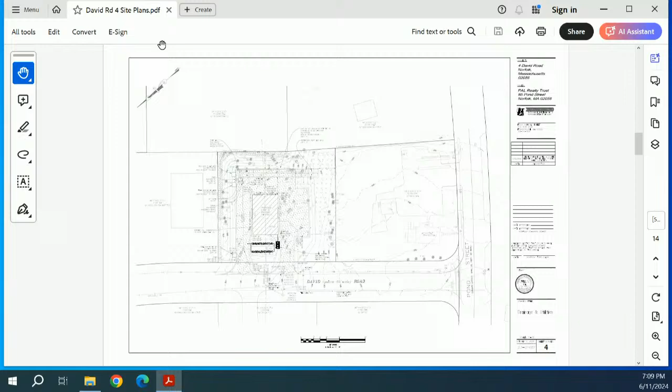Thank you, Richard. I'm Bill Buckley from Bay Colony Group, excuse my voice. As Richard said, one of the things we were waiting for was to find out if the community was going to put a water line down David Road in order to serve that development. One of the issues we had was having a well on the site. It's a relatively small lot, a little over 30,000 square feet, and you have to have separation from a well, from water, from drainage, and from septic, and it was just too tight of a site to do that. So when Richard came back and said what the community is looking at is putting a water line down there, that kind of solved that problem.

The other changes we made, if you look at the drawing here, we moved the building to the right, slid it maybe about 15 feet or so. The reason for that is the left side of this lot and the rear of the lot, if you had a chance to go out there, you can see that there are walls there.

There are already walls along the lot lines. What we were going to do was increase the size of those walls in order to maximize the amount of area that could be used for building and storage for the facility. Subsequent to that design, which we had filed, we went out and priced it, and found that it's really expensive for the additional area we would have gotten.

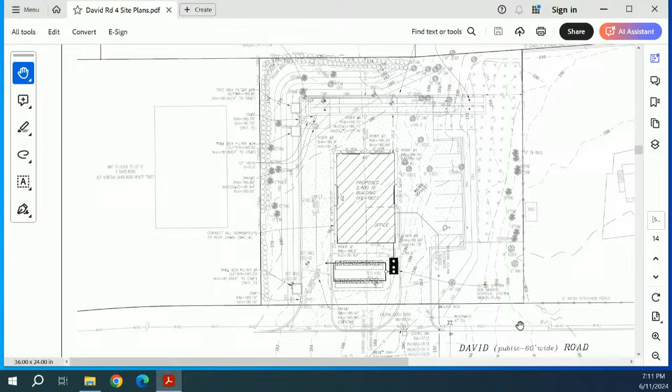So what we've done is moved everything to the right and from the rear. If you look at this drawing, in the previous design we had storage in the back here, and now we're sloping it up to meet the new grade there. Over on the left side, we took the top of the wall, not touching the existing wall, and sloped it up to meet our grade, which is about the same elevation as David Road out front. Right in this area, finished floor is 187.

So that's the major change. We also met with Richard and the building commissioner, and went over some of the zoning issues. For example, this loading storage area, this loading area in the corner here, I asked the building commissioner what he wanted, and he said just give me 400 square feet. So we gave him a 20 by 20 foot area for that.

We also changed the mixture. You can't see it here, but if you look on your plan sheet, upper right-hand corner, sheet 3, there's a zoning block. We changed the parking requirements. The numbers really didn't change, but we broke it down differently so that it conforms with the Norfolk zoning descriptions of use.

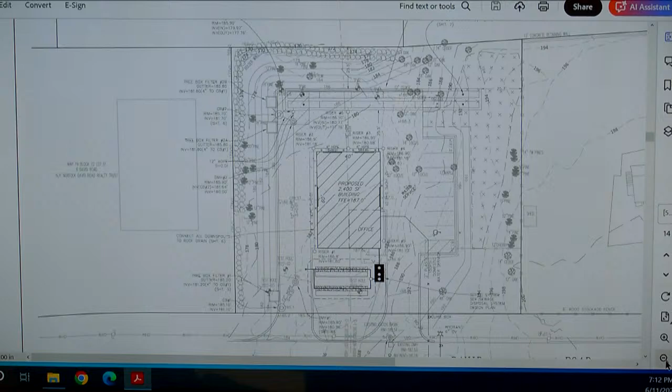So now it's some manufacturing, some storage, some general office space, and the building commissioner also told us to include parking spaces within the bays. So we have 11 spaces. We're required to have 7. We have 7 outside. So that was a change that we made as well.

And then there was a lot of detail-oriented work that was done for us in order to answer the consultant's comments. There's still a couple of things out here that Richard has highlighted for me to address.

The first one was the loading zone, 20 by 20, and they said typically it's 40 by 10, and the beta defers to the board. We don't really care. If you'd like it to be 40 by 10, that's fine, but the building commissioner said as long as there's 400 square feet, he's satisfied.

So what's the purpose for that loading zone? Good question. I would say it's probably just to pull up and take material out until it's moved inside the building. But realistically, I don't think it's going to be used. It's just a requirement under the zoning.

On this particular site, we have loading and unloading up in this area here, which any vehicle that needs to come in can either come in from the existing site, which they do now. Actually, this whole area, a lot of it is just gravel, or we're showing a forklift access down here. So a vehicle could pull in, unload, forklift up in here, store materials. But the intent really is to put the materials inside because of the business. It's a fencing business, so you don't want to store it outside until it's manufactured into whatever it's going to be.

In terms of zoning, the purpose of it is just to make sure you have adequate space on site, so you're not loading and unloading on the public ways or drives and so forth, and that it doesn't interfere with parking and circulation on the site. Okay, thank you.

One of the comments they made was they want a 4-inch thick, dense graded crushed stone, which is fine. We can add that under the pavement.

Their comment was 0.5% grade. They wanted us to add more drainage structures. 0.5% grade is a standard that's acceptable, and it's really up to the contractor to do the job correctly. Pavers usually don't like it, but that's tough. It's acceptable. We don't think it requires any more drainage.

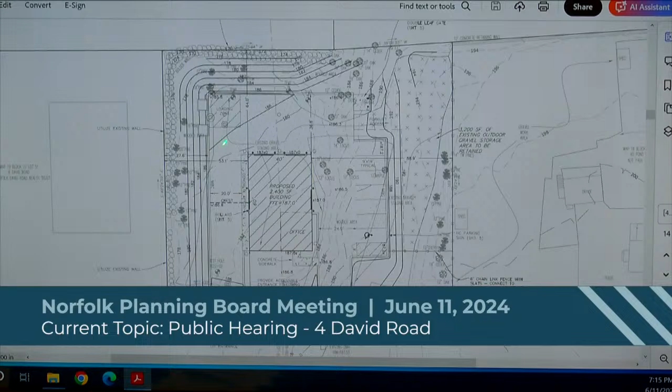Everything drains to the back of the lot now in this corner, and up in this corner here. Water either drains at this point, or drains to this catch basin, which is connected directly into an underground drain system not shown on this sheet. Then this flows around to the corner here. As I said, this is a small site, really quite a small site. So we believe the amount of structures we're showing is adequate, especially since the roof is being tied directly into the underground drain system.

So that's for P1? That's for the comments, sorry. No, that's for T1, the loading zone. T2 is the vehicle enter and exit, which I'll talk about in a moment. P1 is the profile. Just for ease of following through, if we could go through them in order. Sure, we'll go T2 next.

For T2, we provided a turning radius plan. These would be small tractor trailers showing up and supplying material. What we showed is a plan where the vehicle pulls down the street, backs in, unloads, and pulls out. It's a WB-40, not meant to go around the building, just to pull in, unload, and go out.

We actually raised or changed this radius to make it bigger. You can see here it was a 10, and we made it larger. Same thing on this side—if a tractor trailer was going to pull up, back in, and pull out, we made that radius larger as well. We received a notice from the fire department a couple months ago that said they found the access around the site acceptable.

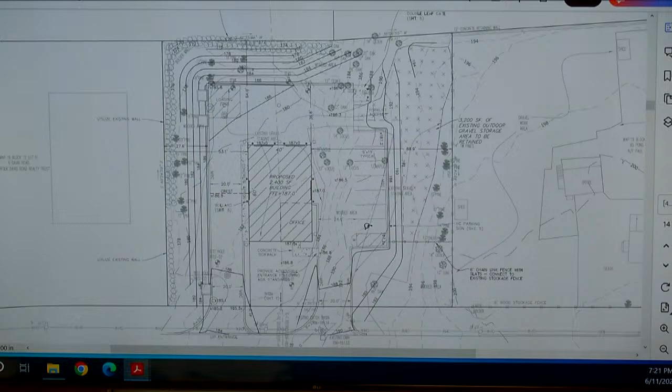That was for SW6. 6 or 7. Oh, yeah, okay.

And then SW21 is, I think, more of a pay attention item. It talks about sedimentation, where we're going to put temporary sediment basins, etc. Again, that comes under the construction stormwater pollution prevention plan when the contractor is chosen and decides his methodology to build the site. So that's a moving target as he moves forward on his design. I think somewhere in here it requires us, at a pre-construction meeting, to provide an updated stormwater pollution prevention plan, since at that point you'd have the contractor identified.

Yeah, although it's a popular topic, probably not going to require it, right? SWPP, because it's less than an acre? It doesn't require a NPDES permit, but we did prepare a SWPP plan.

So you do have a SWPP, okay. And it's on one of the sheets - I forget which one. All right, okay. Sheet 8. Yes, you're right, we have the pre-construction.

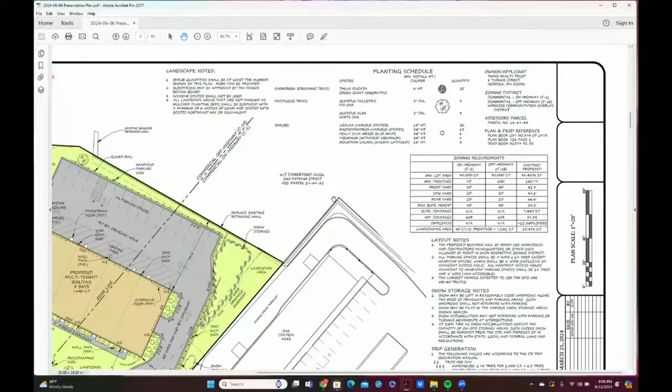We added more screening trees to the left of the site. We have a residential home next to us. We added a loading area across the back. We added a more detailed planting schedule, calling out particular species, sizes, trees and shrubs. And actually, the other thing we did is add a freestanding sign here. This will be on granite posts. It'll meet the size and height requirements of the bylaw. It's very much similar to other signs up in the industrial park there.

The majority of the work we did was on the stormwater management system. I think Bill was lucky he got first, because we separated our roof system from our driveway system at the request of the peer review consultant. So these two systems now work in tandem to handle all the driveway and loading areas, and the other system was separated out to handle roof runoff. We reworked some of the stormwater management calculations and report, and we got a clean bill of health from your peer review consultant. We also added a small rain garden down at the right driveway entrance.

There's really not a lot in Beta's memo outstanding. We can go through anything you want, but on SW1, there's a boulder wall across the back of the site. The applicant's going to replace it with an engineered concrete wall. Detail was added to the plans, but that wall requires a building permit, so when the applicant has that designed by a structural engineer, we'll provide copies of that design to the board. That's one of the conditions of approval that's been drafted for you.

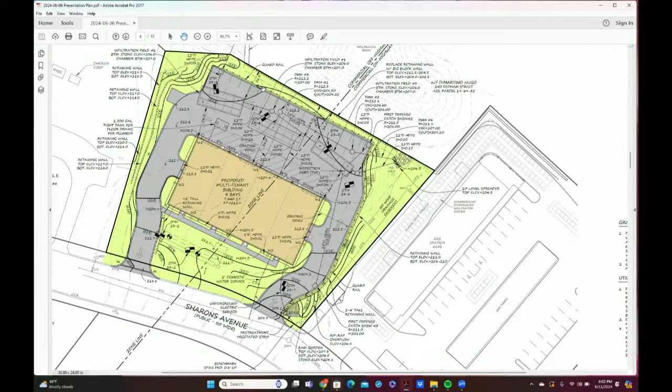And that's about it. SW8 is also deferred to the board. So, how will future property owners know? My suggestion is that you incorporate the O&M plan as an attachment in your decision, because your decision gets recorded at the registry. And if the O&M plan is an attachment, it's there as well. It's easier than just recording an O&M plan by itself with no context.

Similarly, Rich, did you call that out on the decision already? I did not. So you could just add a page to the back of the decision, attachment A, O&M plan. I provided that to you this afternoon. Yeah, you already did that as a separate standalone plan. Easy enough. I think that probably will be a nice standard kind of condition, probably. Yeah, it's a good thing to do, because it keeps it on record with the decision, so it's out there forever. Yeah, I do like that idea. It's a good idea.

Did we ever figure out why there's multiple names for Sharon Ave? Sharon, that is legitimately the correct name. There's Sharon's Ave too, and record plans that say both things - Sharon and Sharon's, some with an apostrophe. The assessors have it listed as Sharon Ave, no S.

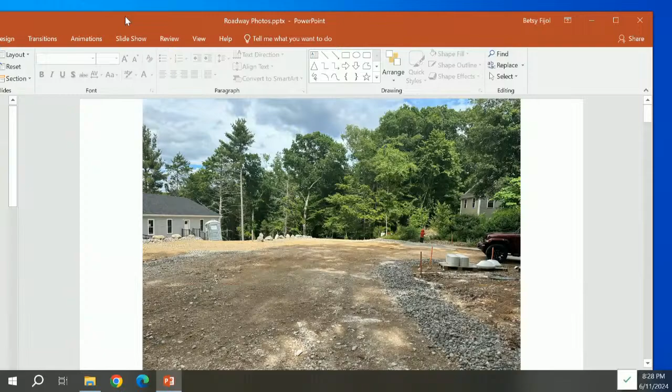There we go, we got pictures. Can you see it now? Yes. Chad, do you see it? Yeah, I see it. All right, so it's so nice without that big fence - yep, the fence is gone. You can see the perimeter with the stone riprap. Well, it's small stone, but that's what was called for in the plan.

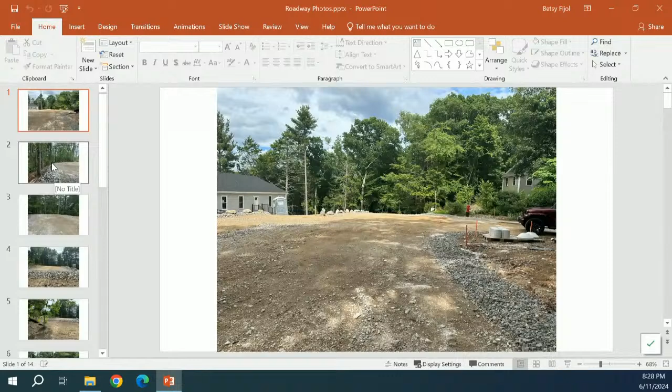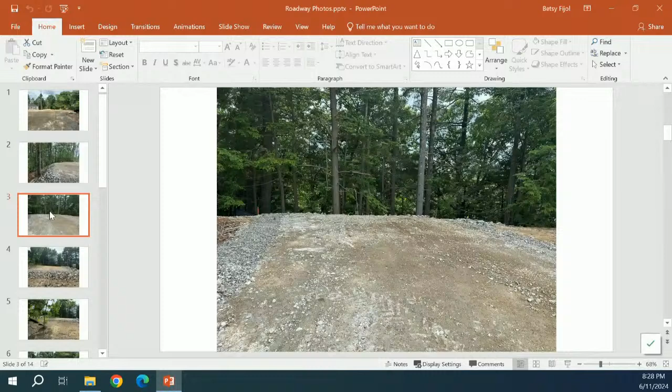If you go to the next slide, this is looking up Hunter Ave to the left, which will be paved. Another view of it - it's actually quite a bit bigger than I thought it was going to be, plenty of space. This is looking up MacArthur Ave towards Hunter Ave.

The larger diameter riprap was put there at the request of DPW to act as a way to slow any runoff coming off that pavement. That makes sense. The house on the right is the new house. So you're taking the photo from MacArthur? MacArthur Ave, yeah, and the new home is looking up towards where the porta john is.

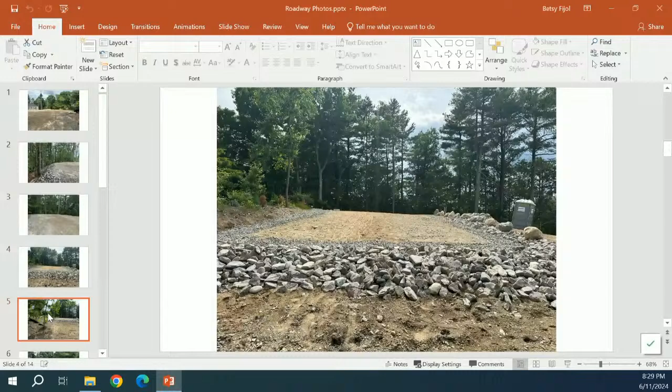Okay, and to the left of this photo is Hunter, up by the fire hydrant on the left. Just another view looking up at it.

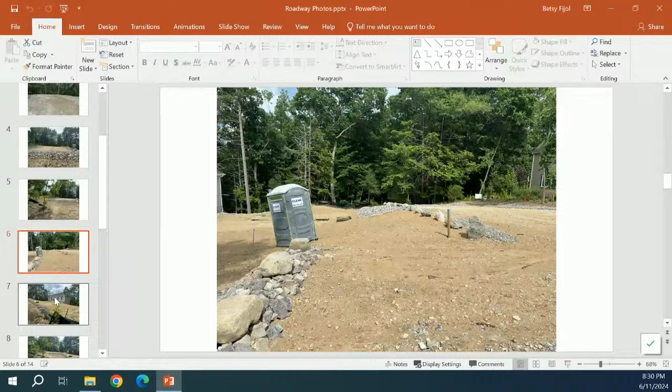Porta John, lovely. Where is the driveway? It's on a slope. The driveway is right to the front left - there's really not a driveway, it's just going to be pavement, parking. What you see in the bottom of that photo, to the left, right in center where that riprap is - in front of that will be the paved area for parking. Oh okay, and then you'll have to figure out how to get to the house.

If you were to travel on Lakeshore Drive and look back, it looks like a 3-story house up there because it's 3 levels, built into the side of the hill.

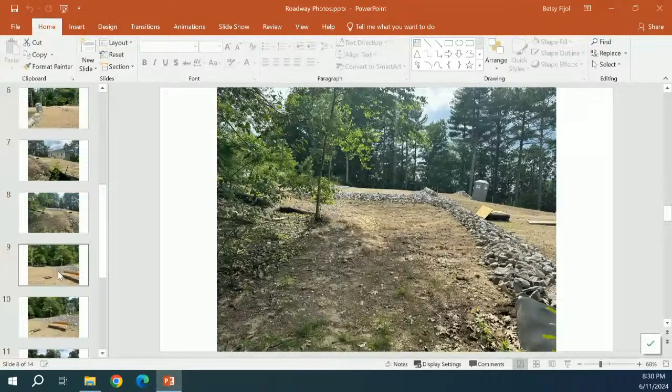Everything is lined up to be paved and be done to meet the time frame. Are they looking for a fall street acceptance? I don't know, we didn't go that far, but I suppose it could be. I've talked to DPW and it's looking close. Then we'll get updated as-built and all that once it's complete. So maybe a possibility in the fall, and if not fall, it should definitely be spring.

The house has got quite a bit to go internally. Is there a reason the hydrant's like 2 feet in the air? I noticed that when we walked it last year. Does that happen often? It does happen, how often I don't know, it's a good question. I figured it'd be filled in, but I guess it's not part of this actual project. It was installed by the applicant, that new hydrant was installed for the project. But think of wintertime, it'll always be seen.